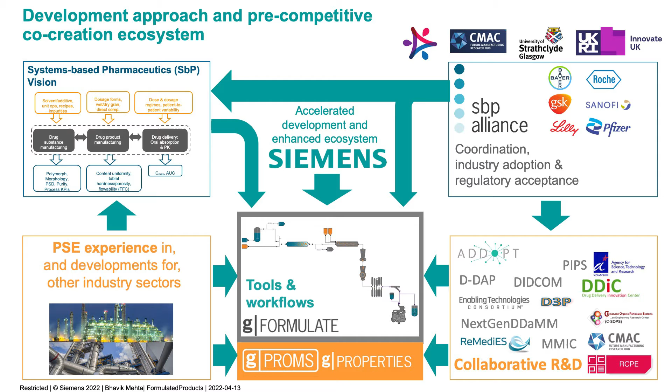PSE or SPSE has a lot of moving parts. You've got the alliance with the pharma companies, you've got the systems-based pharmaceutical vision, and then you've got the funded opportunities and the collaborations with CMAC and other university partners. This helps develop gPROMS FormulatedProducts, gPROMS Process, model builder, and so on. With the Siemens acquisition, this has just made things go faster and brought more expertise in the same field.

A little bit about the project that I have been working on as a KTP. In terms of the aims of the specific project, I'm working to make it easy to model on gPROMS FormulatedProducts. This may include example cases in releases, robustness improvements, inclusion of workflows, etc. You don't have to read all of that - it just says basically that I'm working to make your life easy when it comes to modeling.

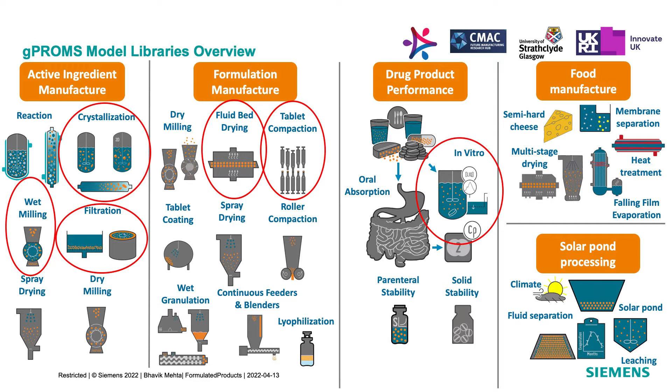In terms of the model libraries, this again is slightly outdated - there's a couple of new libraries that have been introduced and another one upcoming, which I will talk about in a bit. But this is the breadth of the libraries available in gPROMS FormulatedProducts, all the way from active ingredient manufacturing to drug product performance and also food manufacturing. As part of the KTP, I've worked on a few of these, not all of them, and there's a couple others - one more that I'm also working on, which I'll talk about a bit in the outputs.

In terms of the outputs, I will be talking a little bit more high level, so I'm not going into details of what the models are, the kinetics behind the models. I'm just talking about how the project has fostered innovation and collaboration between the two, the industry and the university.

So one of the things that has been developed through the project are digital design workflows. So these are guided workflows that will help you model processes using specific model libraries in gPROMS formulated products. So for now, these have been developed for crystallization, seeded cooling, and pressure filtration libraries.

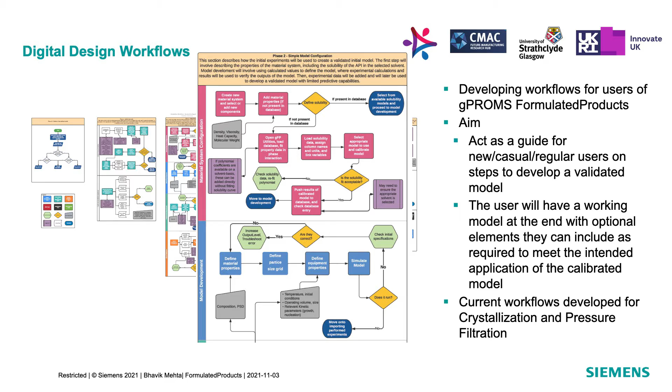Another thing that I have been working on is developing help documentation for guiding model validation in gPROMS formulated products. One of the things that you need to do in gPROMS formulated products, if you're not familiar with it, is when you're trying to estimate your kinetic parameters, you need to set up a model validation entity, specify initial guesses and bounds.

So the idea through this KTP was to guide that for the pressure filtration unit and define how you would choose your initial guesses and bounds and help you do your model validation or kinetic parameter estimation a lot easier. So this has already been implemented. I know it says ongoing because it keeps being refined, but this is there in the help documentation within gPROMS formulated products.

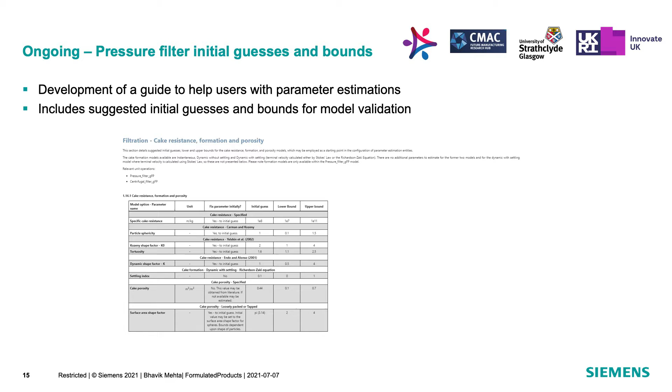I know the image is not very clear, but you can see that based on the kind of kinetics that you want to estimate, whether it's cake resistance or specific cake resistance, formulas like the Carman-Kozeny cake resistance equation or Endo-Alonso and so on, these, oh, thank you for the mood lighting.

So you could go onto the help documentation, and that would be a good guide at least, we hope, to help you get your validated pressure filter model. So again, this is not only for pressure filtration. There are others available within the help documentation, but through the KTP and through the collaboration, I was able to develop this for the pressure filtration unit.

Another thing that was developed through this was a continuous filtration case. Now, this was done using data generated at CMAC by other researchers, so Sara Ottoboni, who you heard from yesterday. And this was data collected using the AWL continuous filtration unit. And the idea was to try and mimic this in gPROMS formulated products. And the model that was used was the Carman-Kozeny cake resistance model.

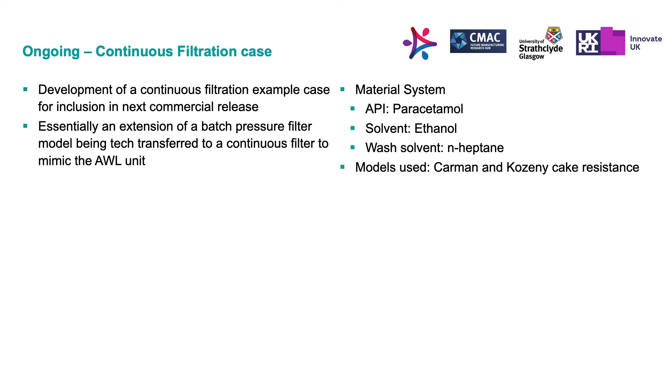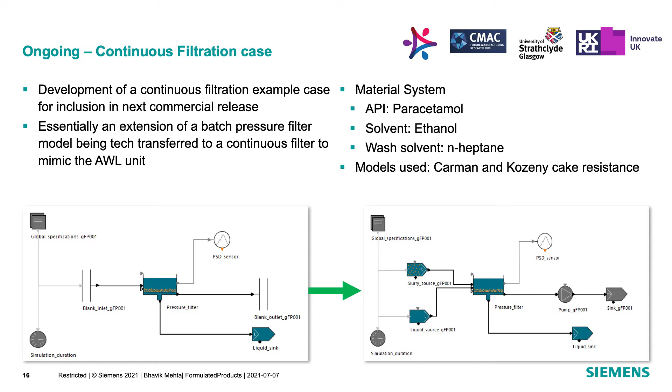What you would normally do is start with a batch pressure filtration unit and then connect everything else and translate it into a continuous pressure filtration unit. The idea here was that the work would make its way into an upcoming release.

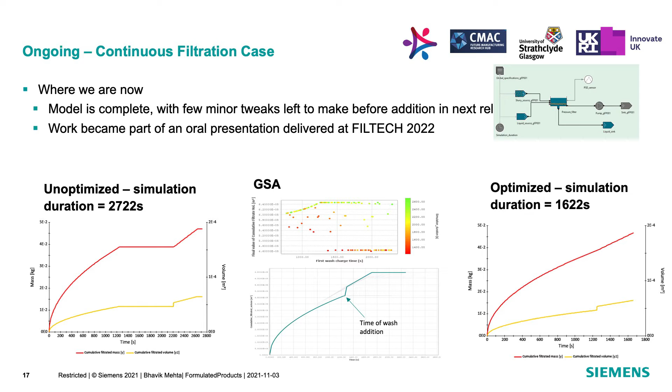The work was also presented at Filtech a couple of months ago, where the optimization of the way it was done in the lab was conducted through gPROMS, and I was able to realize a significant reduction in the time taken to do this process. Now, in reality, you wouldn't be able to minimize the whole 1100 seconds or about 18 minutes of time. But the idea is that through gPROMS, you're able to realize this, and you can see that there are parts where you can make these improvements.

And I'm happy to speak to you about this outside of this, or if there is time after the talk, I'm happy to answer any questions.

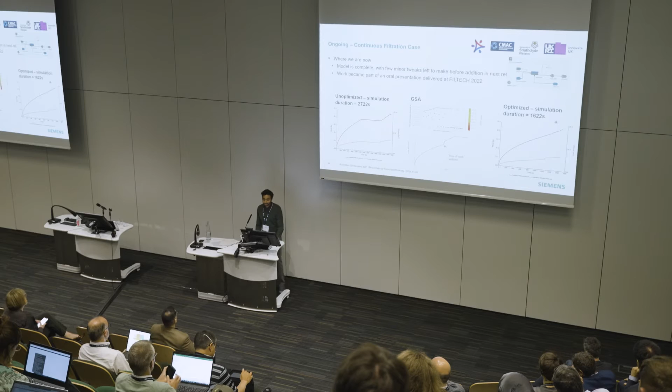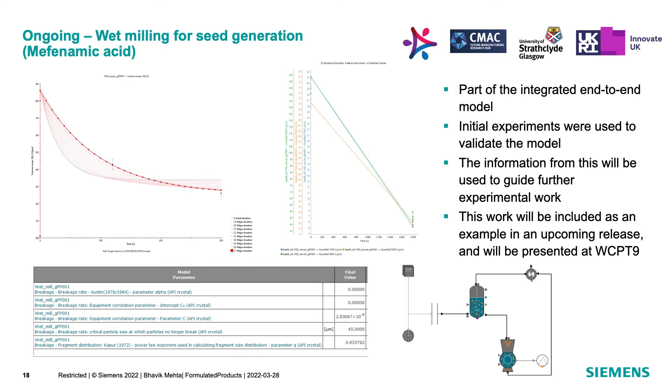Another project that I've been working on as part of the wider hub mefenamic case is the wet milling experiments, or wet milling for seed generation of mefenamic acid. Now, this will form part of an integrated systems model. And the idea is that there were experiments done previously that were used to generate a model, and they were used to guide further experimental work based on the findings from a design space exploration, which I haven't shown here.

But the idea is that based on the findings from the model, someone from CMAC was able to go back into the lab, get more experiments, and now those experiments are being used to revalidate the model. So it's more model-driven experiments, model-based design of experiments, and this work is a poster over there in conference room 4. So if you have any questions about this, I'm happy to answer them. It will also be presented at a conference in September in Madrid, hopefully.

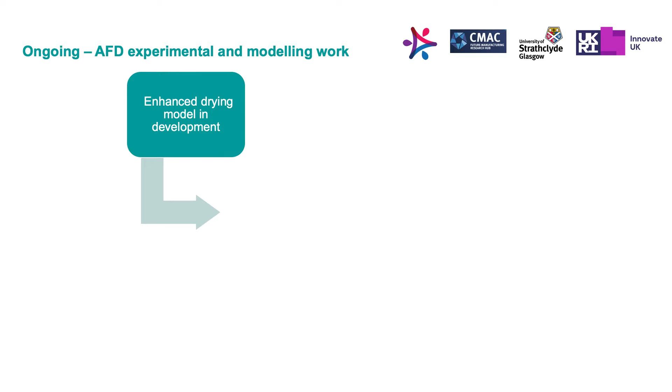Another thing, so I mentioned a new model library that's being developed within gPROMS FormulatedProducts is for an agitated filter dryer or enhanced dryer. So the development is done within gPROMS. The idea was, can we collect some lab data from CMAC or design some experiments to guide the model testing and model development? So just last month, I came down to CMAC and worked with Sarah and Chris Price from the chemical engineering department to gather some filtration and agitated drying data using the AWL unit that is based in ChemEng, or the newer version that you may have seen in the lab tours yesterday or today if you go.

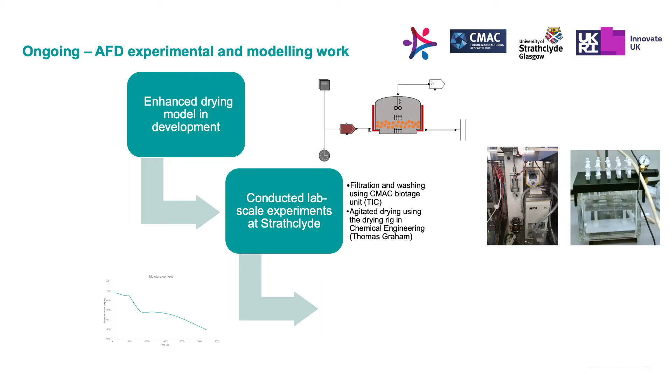So the model is currently in development. You can see an example flow sheet that I created just a couple of weeks ago. And those lab experiments were done using, as I said, the AWL drying rig in ChemEng. Again, the idea was to collect the data on moisture content evolution over time and use that to analyze the model and test it.

Another key output of this, so you've seen the benefits that have been realized by the industry, by PSE, in terms of model development, robustness improvements, example cases. So what's in it for the university? So lots of conference presentations in the last year and a half. COVID limiting, because most of them were virtual, but I was involved in about 3 oral presentations and 3 posters at various conferences in the last 6 months, really.

And these ranged from simple model configuration, a tech transfer from batch to continuous, or using SAFT-gamma Mie to drive your solubility predictions and so on. So things like this are benefits that the university would realize, and also there are some publications that will come out of some of these conferences, or some of these outputs.

So benefits of the partnership for me. So the collaborations with Siemens PSE in general. I've been part of the active ingredient manufacturing practice area, the product development team, where I've worked on improvements of the model libraries as well as example cases and model enhancements. I already mentioned the continuous pressure filtration case, but there is another one on centrifugal filtration that I'm working on as a tech transfer from pressure filtration to centrifugal.

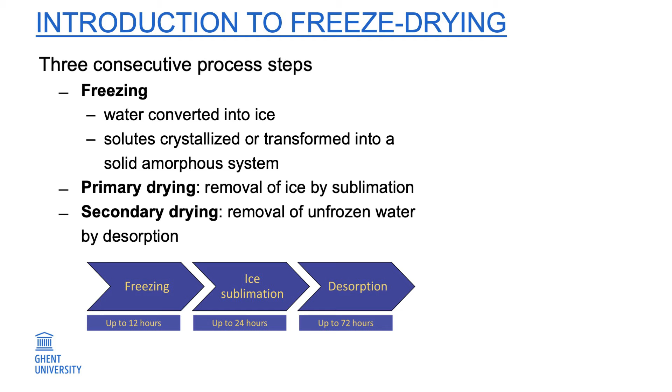You can also see here at the bottom that the freeze drying process itself is quite a time-consuming process. Freezing up to 12 hours, ice sublimation up to 24 hours. Desorption can also take several days. So freeze drying processes of several days are not uncommon, even a week.

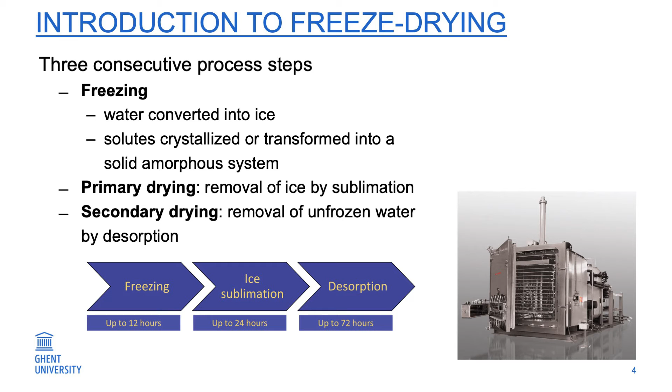And here you see the conventional freeze drying equipment, which is used for decades. So it's batch equipment. The system is, let's say, filled with tens of thousands of vials on temperature-controlled shelves, as you can see here. So after the loading of the system, the door is closed. The freezing process starts. After freezing, the whole system is pulled under vacuum, and then this induces primary and secondary drying.

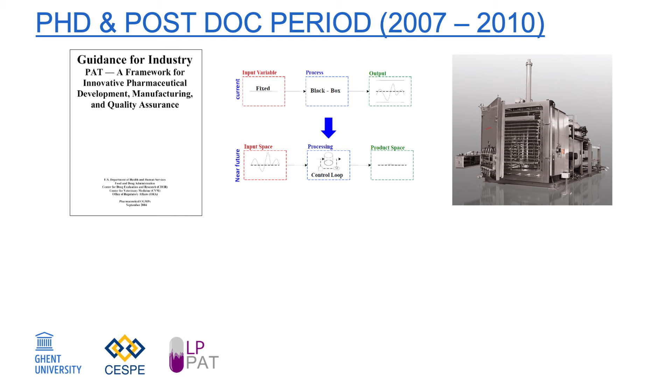Actually, my freeze drying research activities started already during my PhD and postdoc period back from 2007 to 2010. When I was at the start of my PhD, 2007, that was just a couple of years after the PAT guidance was published in 2004. My PhD promoter at that time told me, okay, now you have to develop PAT solutions for conventional batch freeze-drying processes. So I had to work a little bit on how to move from a fixed process recipe without a lot of process monitoring and control to a controlled freeze-drying process.

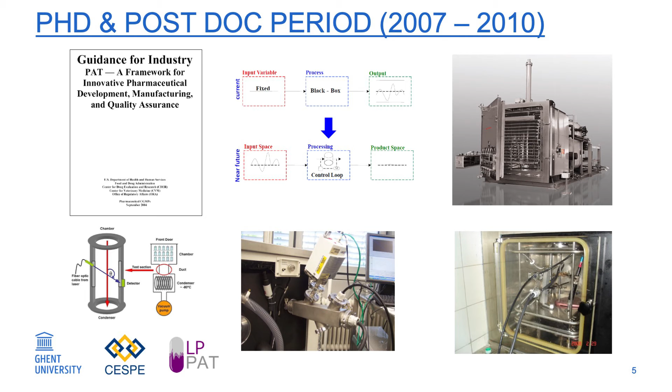So, of course, a lot of academic research was performed. You can see these pictures here, which are typically pictures that you can take in an academic research group where you try to implement sensors, where based on these sensors you try to develop process understanding. You try to implement sensors that allow you to visualize how the product is behaving during the process and so on.

But towards the end of my postdoc period, we came to the conclusion that there is some conflict between the goals which are stated in the PAT guideline and conventional batch freeze-drying. It was quite challenging to have a process monitoring and control system implemented that allows you to monitor and control the process at an individual product level.

Taking this into account, there are also some inherent issues or challenges with conventional batch freeze-drying. There is a high production cost, a huge footprint, high capex and opex cost. It's a very slow process, as mentioned. Upscaling is also not very straightforward. When you start developing your batch freeze-drying process in a small lab-scale freeze-dryer, and then you need to scale it up to a production-scale freeze-dryer, that almost requires complete re-optimization and revalidation.

But also from a quality perspective, there are some issues. And let me first explain what the potential issues are. So here at the bottom of the slide, this is a reference from University of Eastern Finland. You see actually the top view of a shelf. So on these shelves, you have some hundreds to thousands of vials. Every small circle on this figure here is representing an individual vial. And the color is referring to the process progress.

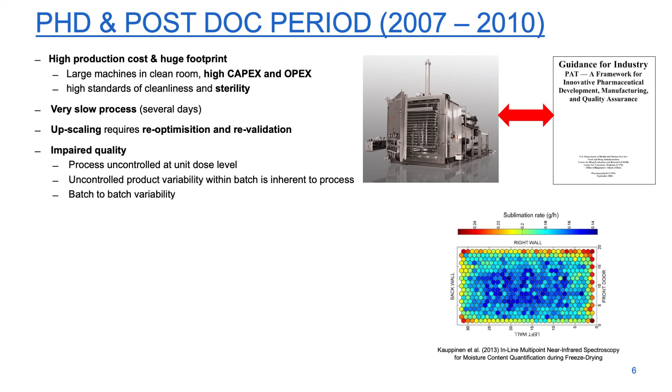So what you clearly see here is depending on where the individual products are in the batch freeze dryer, they undergo a different process. And this is, of course, quite in conflict with what process analytical technology stands for. A couple of years ago, for instance, a company like Pfizer presented on lyophilization issues at the PDA conference, and this was also what they mentioned there. There is an inherent potential quality problem with batch freeze drying.

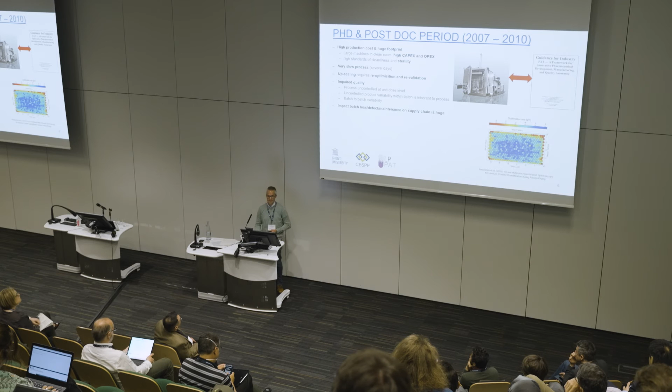Also, when you have tens of thousands of vials in such a batch freeze dryer, the impact of batch loss, defects, and maintenance on supply chain is huge. There is also clearly a lack of flexibility. However, when you think about the processes before and after freeze drying, filling of the individual vials, that's a continuous process. Capping, packaging of these vials, that's also a continuous process. So it would be great if there is a continuous alternative for this. Furthermore, when we also think from a product-related perspective, there is also a new need.

Personalized medicines need flexible production campaigns and supply. There is also an increased importance for low volume and high value products, so this also requires flexible manufacturing technologies. But also several new products require better controlled process settings.

At the start of my professorship in 2011, I had a colleague with whom I was working, and we had a new freeze-drying idea, in which process understanding is crucial, where we also try to do process monitoring, but also control at an individual vial, at an individual product level. So not only the monitoring, but also using in real time the information that you get from your sensors to guide the process towards the desired state.

This creates an inherent real-time release potential. It's a continuous process, but it's also a product enabler. And this technology is now covered by several patents.

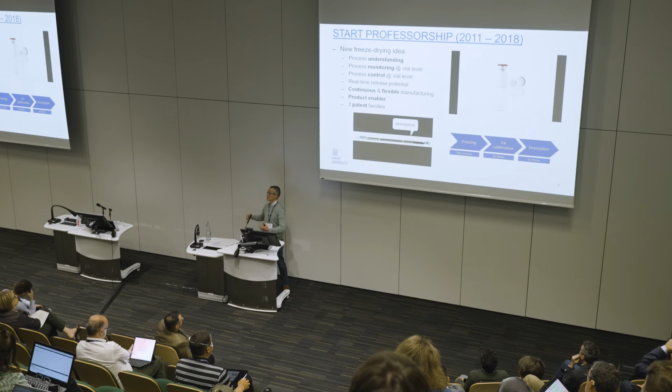One remark, between the modules we have load locks, because for instance, spin freezing is performed under atmospheric pressure. Primary drying, secondary drying is under vacuum, so you need a fast way to transfer the vials there. That's based through load lock systems, and you can do that in seconds, also in a clean way.

Scale up is also, let's say, flexible. It's a modular system, so based on the size of the modules, but also by placing modules in parallel, you can, let's say, create the production capacity that you need. So this was all, let's say, research done at Ghent University.

Well, then, in the final step of the Ghent University research program, we obtained funding to build a first demonstrator prototype. So this was the first demonstrator prototype continuous freeze dryer which was built. As you can see, it's of course a non-GMP system. However, GMP principles were taken into account already during the development.

So what you have here is a manual infeed of the vials. Here you have a load lock system. On the left, there was then the spin freezing module, and then on the right, you have a drying module, the vials coming out the same way.

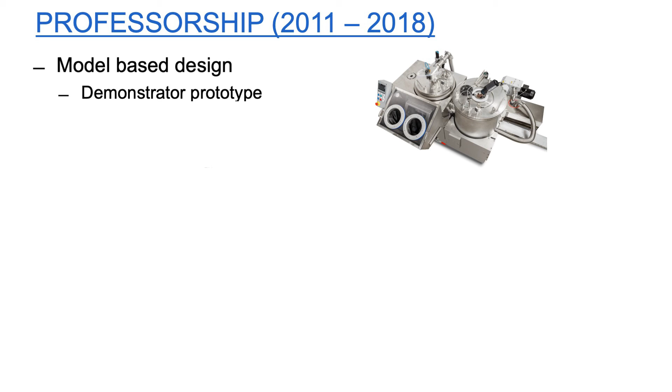What I also want to mention is that we used a model-based approach, a model-based design approach. Before building this prototype, we first physically described in mechanistic models what the process should do with the vials. And then we used this knowledge to build the equipment around that. So model-based design approach was used.

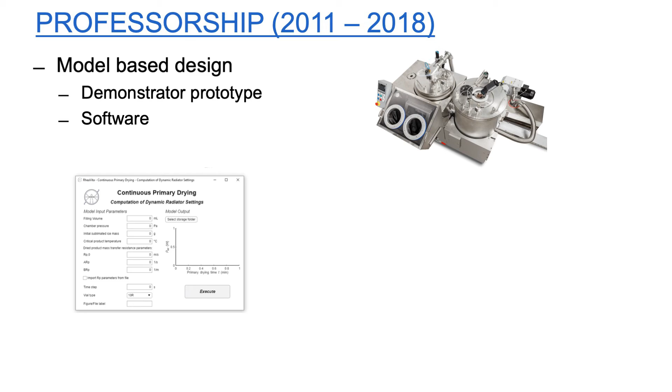But since we now have the models in place, well, this also provides us a software opportunity. So we have now the models that we have anyway built, implemented in user-friendly software. So if you have a new product, based on the product properties, you can fill that in the software, and then the software will tell you how you optimally set the continuous freeze-drying process conditions. So with very few experiments, you can, let's say, immediately optimize your formulation, but also your process.

Then here, as a final movie on this slide, you can also see an example of the feedback process control, which is inherently implemented here. So as mentioned, the vials are continuously monitored with a thermal imaging system, where that information is in real time, and this is an example for primary and secondary drying, giving feedback to the radiators.

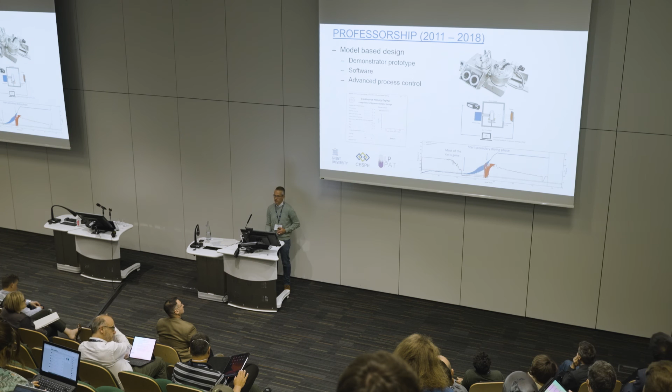So here you can see we need to control the temperature of the product during the drying phases. The product temperatures may not exceed a certain critical temperature. Well, you can see that this information is, let's say, immediately used to set the radiators, which are the red line. So this process is constantly steered.

And that was actually the end of the academic phase. So once this prototype was ready, once the control systems were implemented, that was the start of the spin-off company from Ghent University, RheaVita. Also for myself, it was a certain change. I stepped back for 50% at Ghent University and also got the opportunity to join this company.

Of course, the first step there was to establish a company team and also a company organization, so a totally different focus. Immediately at the start, since we had that prototype available, we had the opportunity to start, test and evaluate the technology with several pharmaceutical companies.

So at this moment, and we're still doing that, the technology is tested for a wide range of different pharmaceutical formulations, large molecules, vaccines, cell-based formulations, but also pre-filled syringes, dual-chamber cartridges, highly concentrated protein formulations, mRNA, LNP-based formulations. They also need freeze drying, as you may guess. So that's what we immediately started.

But at the same time, we also had to further develop the technology, because at the start we had a non-GMP demonstrator, but it's clear for pharmaceutical production, we need to be able to produce under GMP in the future. Actually, two technologies were developed then by the company, a small R&D unit, I'll come back on that in a moment, but also a GMP-ready production scale equipment was developed. Furthermore, the software was also further developed, further fine-tuned.

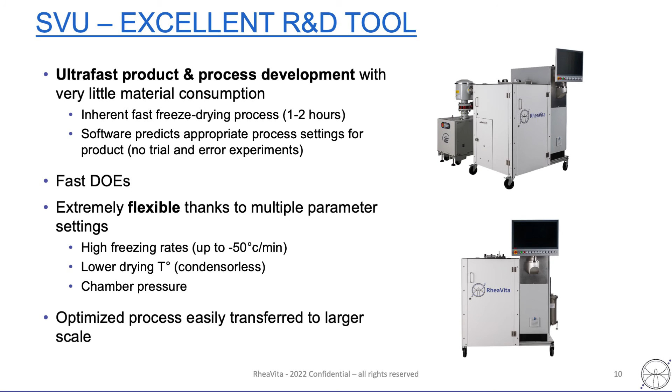Let me first move to the R&D tool. We call that the SVU. That's a single vial unit. So in this system, you simply process one vial. You do that in the early phases of research and development.

So as I mentioned, when you have a new product that needs freeze drying, based on the formulation properties, the vial dimensions, and the filling volumes, with the user-friendly software you can immediately determine what the optimal freeze-drying conditions are, and execute that in this single vial unit. Also need to emphasize that the sensors and advanced process control systems are implemented in the single vial unit.

So with a very low number of experiments and very limited material consumption, you can do the entire formulation and process development, including very fast DOEs. When you've optimized your process in this single vial unit, that optimized process can be transferred one-on-one to the production scale equipment. The process signature that your vial experiences can be replicated in the continuous freeze-drying equipment, thanks to the sensors and advanced process control system. So that was a first development.

These single vial units are now sold worldwide. And then in the next step, we also had to develop a GMP Flex equipment. Why do we call it GMP Flex? Because it's a modular system, and flex refers to the flexible production capacity. So depending on the capacity that you need, you can use larger modules or more modules. As mentioned, it's a very fast process.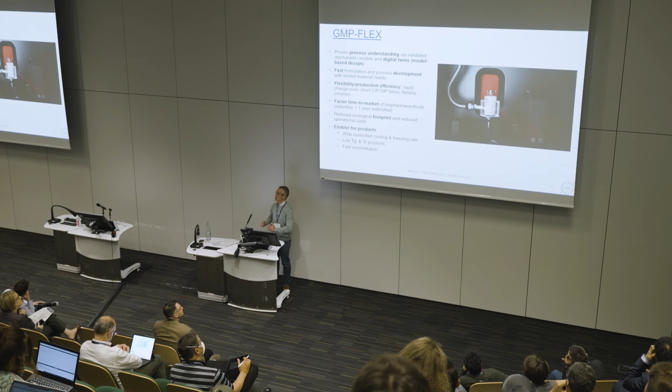That's actually almost my final slide, just to give you an idea of the final developments at the company level at this moment. You see the individual vials immediately coming from the filling lines, so the system can be coupled to a filling line. You don't need the large clean rooms anymore for loading and unloading of batch freeze dryers - you simply connect it directly to filling lines. As you can see here, all the vials are continuously monitored, controlled, and based on load-lock systems brought from one module to the other.

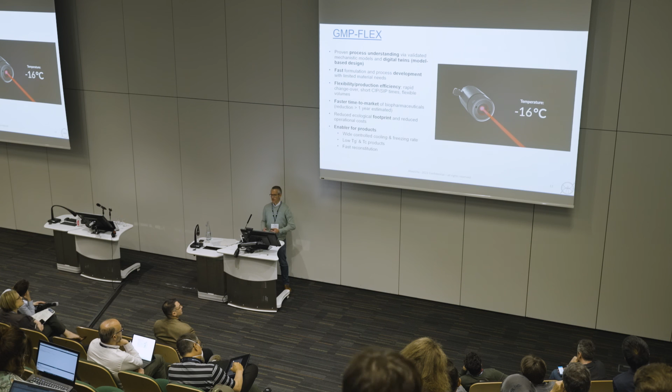What I can give as a final remark, it's also an enabler for certain types of product. As mentioned, you have a much wider range of process settings during freezing, which can be very important for freeze drying. Since we can process at very low pressures and also without condensers - that's just a detail - we also have the opportunity to process products with very low critical temperatures in a very fast way. But also, due to the thin layer at the sidewall of the vial, reconstitution time can be much faster. We've seen that this is very important for certain types of, for instance, highly concentrated protein formulations.

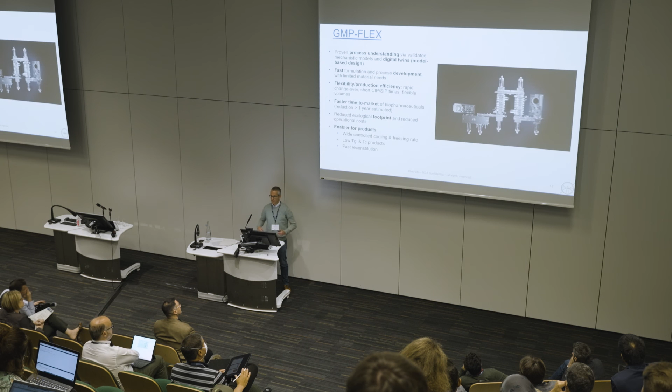So during the movie you could see the vial's way through the GMP Flex system up to stoppering. Now, in the final shot, you see how such equipment looks like. But as mentioned, scaling up - we don't talk about scale up, we number up, we scale out. So this is how this is done.

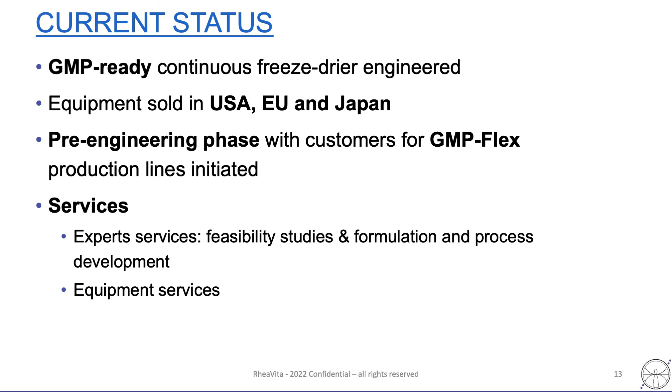So the current status is this equipment. First equipment sold in the US, EU, and Japan. We have also entered pre-engineering phases for the GMP Flex system with customers. But at the same time, we also provide services. We don't want to sell stainless steel - we want to provide solutions for the products of our customers. So we also provide services for formulation and development linked to this technology.

So what are the next steps? We want to have this system, of course, in a pharmaceutical company for manufacturing of product. And I think a very important next milestone for us would be the realization of a first clinical batch, the use of the technology for products that are injected in patients. And also from an organization perspective, further expansion of the team and organization is also very important. It's clear that we need a lot of engineering profiles, and finding engineers, that's quite a job at the moment.

So with that, I hope I was able to give you a presentation, an introduction on how a new manufacturing technology started from early R&D phases in a university up to a spin-off company. Thank you very much for your attention.